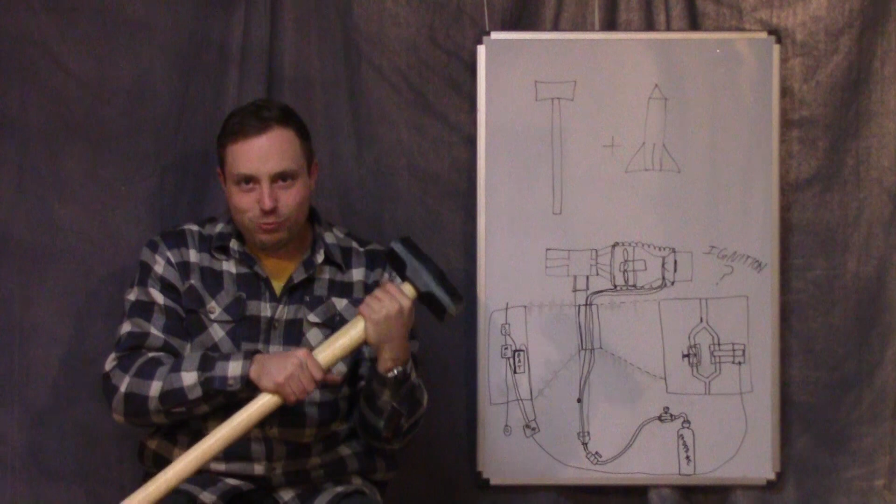How to hopefully build a real-life, no kidding, actual super sledge from Fallout 4. I don't know if I can do it, but I'm really gonna try. So, in Fallout 4, the super sledge has a liquid-fueled or hybrid-fueled rocket motor of some sort on the back of it. Sledgehammer, rocket, makes you swing it fast, hurts a lot, add a heating coil to the front, all that good stuff. I can't do that.

I talked to a NASA program manager, people that know stuff about rocket science, told them all my ideas about different options for fuel and what I could potentially run, because of the impact of hitting something with a sledgehammer. They said there isn't really a feasible thing that I could use as far as an actual rocket motor. They said use solid fuel, fire it once, reload it. I'm going to do that with F-44s from Aerotech. They're pretty high-powered model rocket motors. I'm going to use that on one.

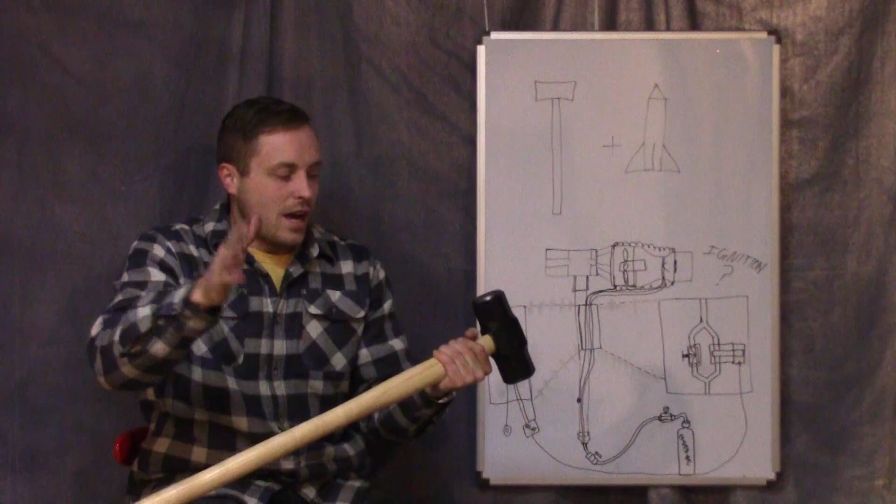But I want something that I can hit the button, and it goes, and you let off the button, and it stops, and you hit the button again, and it goes again. I want it to be on-off, like in the game. I feel like it'd be ridiculous if it didn't do that. So this is my plan.

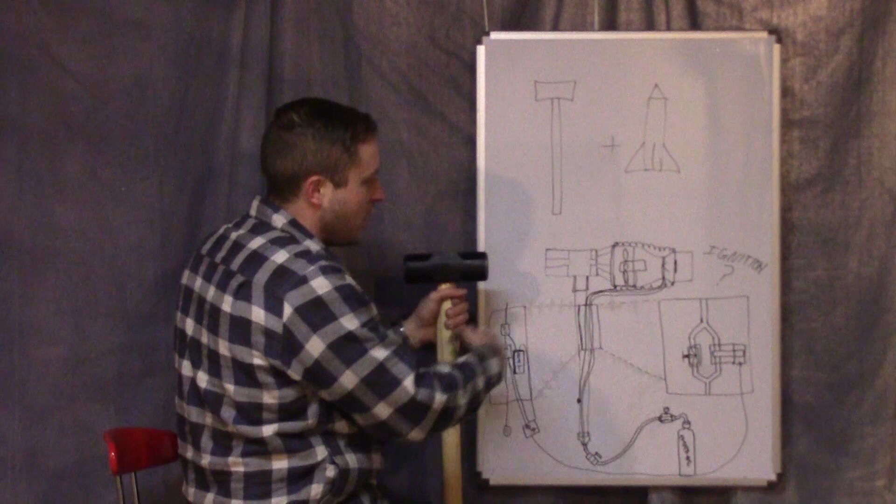I'm going to take some tubing, and I'm going to mount it to the back of the sledgehammer. I'm going to cut the back half off, just like in the game. Mount some tubing on here. I'm going to put the EDF jet fan right there. A little injector system right here, flame holder right there, spring system. I don't know what I'm going to do as far as ignition to get the propane lit yet. And then here's the rest of it. So this is my little control box that's going to have all my stuff in it. That'll probably go here-ish on the handle.

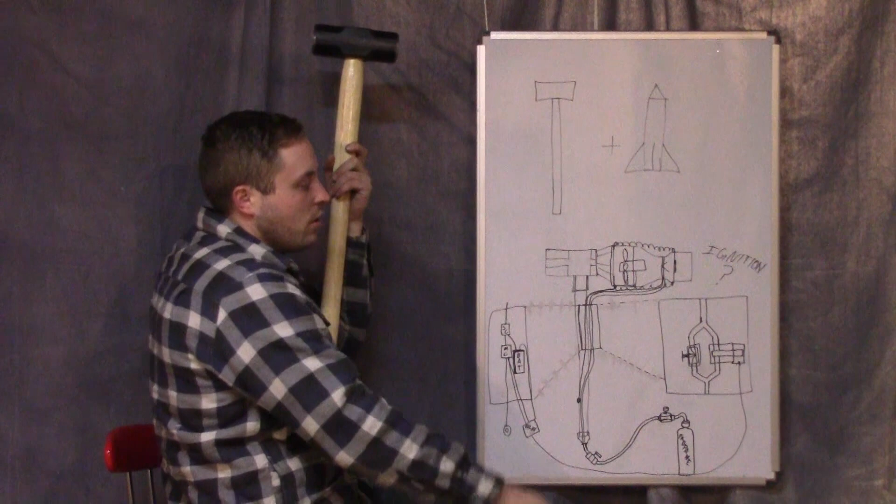And then propane will come in from here, through a regulator, through an on-off switch, up through the handle, in soft line, come out, go into my box. And then it goes into a needle valve system. That's my idle circuit. Lets a little bit of propane through for low-speed idle. And then this is my electric solenoid that'll turn on my full throttle circuit, which dumps a ton of propane in whenever the fan goes really fast.

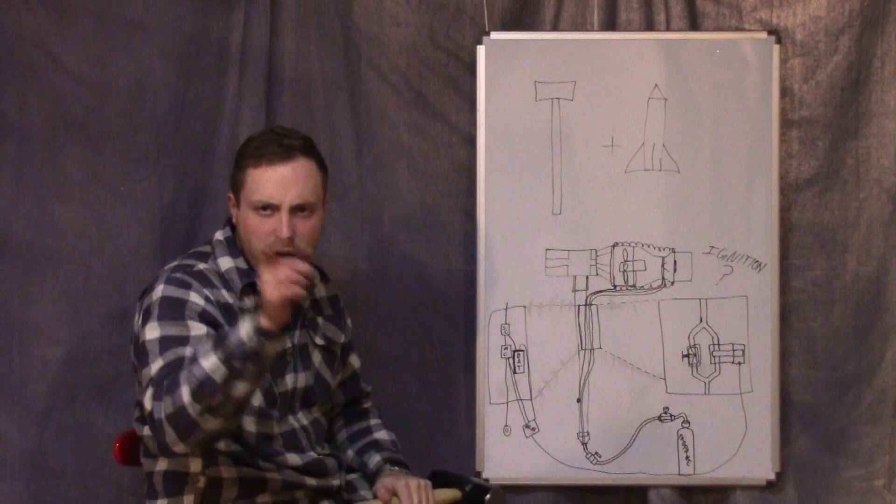So that is controlled by this relay or the microcontroller. I don't know if the microcontroller can put out enough juice to turn this thing on. I'll have to find out. If it doesn't, I'll have to run a relay that runs off the battery. Anyway, my microcontroller will be connected to my on-off switch, which makes the fan go full throttle and this open up whenever I want it to actually make some thrust and swing fast.

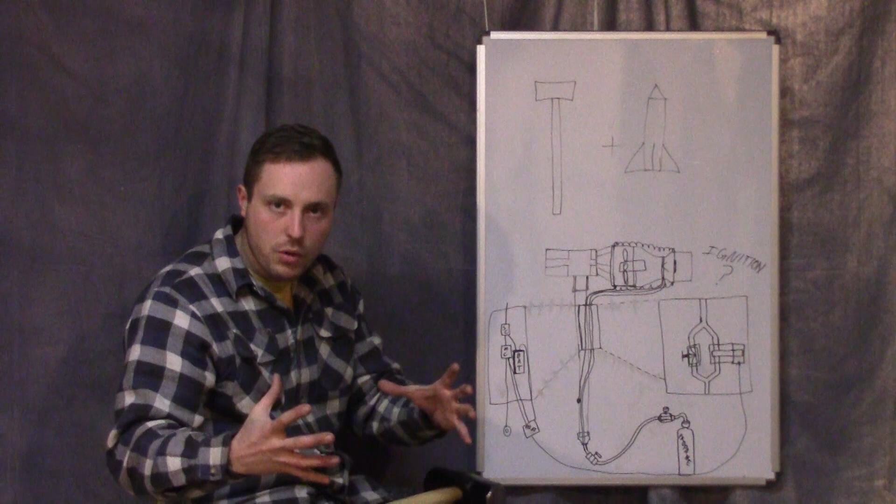And then the microcontroller connects to the speed controller because it's an EDF jet fan, electric ducted fan motor, and those are usually brushless, and mine is brushless. Brushless outrunner, and it's like a 64 millimeter fan, I believe. Anyway, you can't just control them with voltage. You have to send a sine wave to them. This thing does that.

I need to send one of those little things on the jets that move the little flappy doos back and forth. I can't remember what they're called right now. The servos. It sends a servo signal to the speed controller, and that tells it how fast to run the fan.

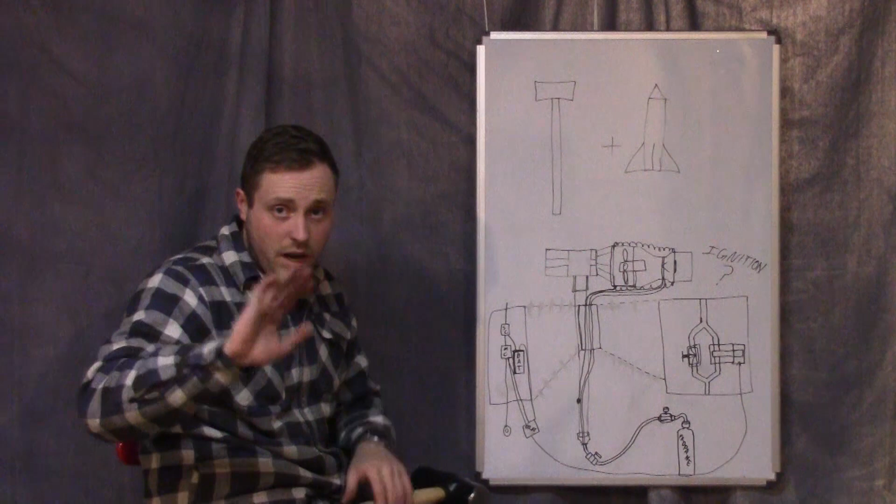So I don't know how to program my controller. I have no idea. I've never done it before, but I'm going to try to figure out how so that I can tell that to go really fast when I hit the on button, and when I'm not hitting the on button, it goes slow, and when I hit the on button, I want this to make this open and send lots of propane in so I get a big, bright blue afterburner flame shooting out the back that looks like the stuff from the game.

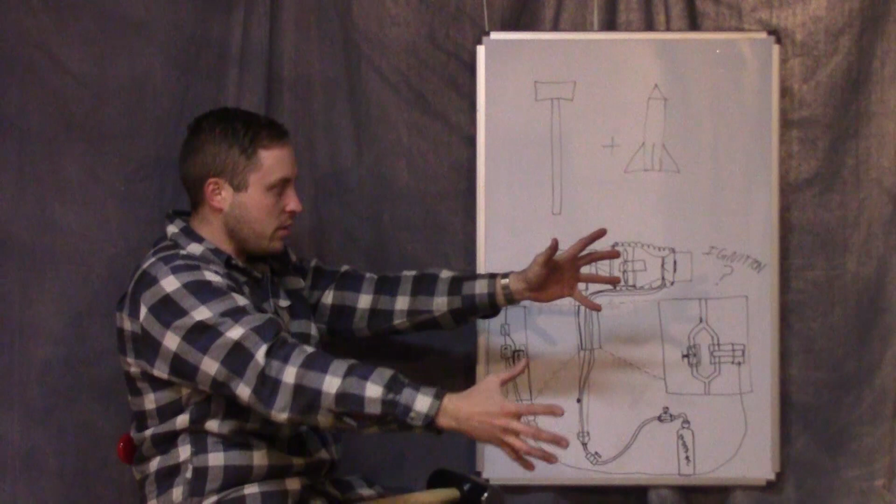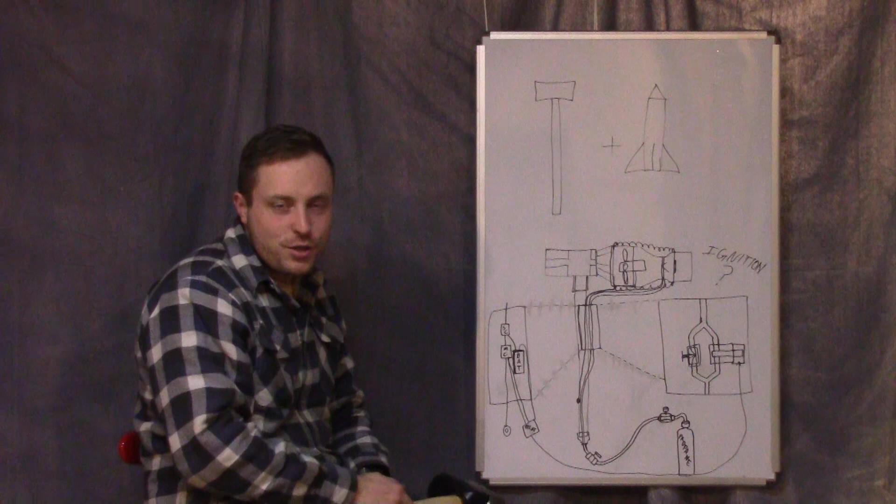The only difference is really going to be that I don't have a tank on the bottom side of the handle, and there's going to be space in the front for this to suck air in instead of a rocket motor that's welded directly to the back of the hammer. I don't know if any of this is going to work. There's probably going to be major changes in between, but I might as well get started and see how this thing turns out. Here's a quick look at the supplies that I think I need, including these exhaust pieces right here that have already been cut.

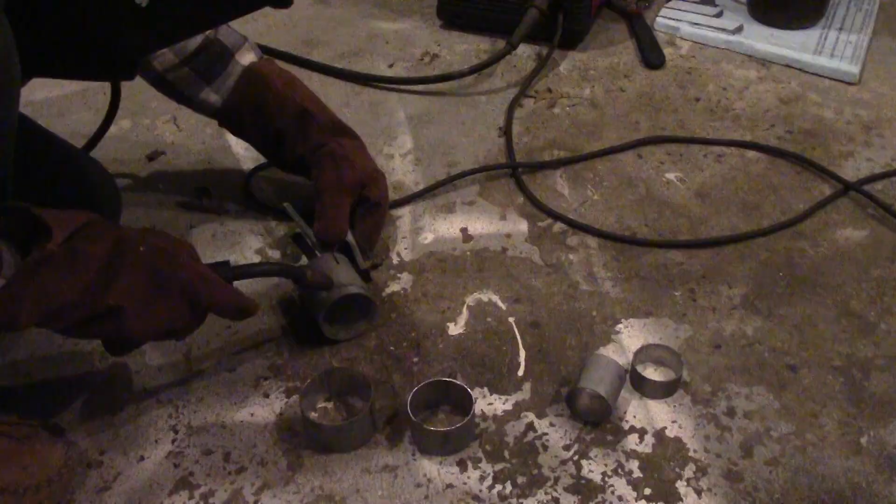Well, it's not as hard as I remembered, and yeah, it doesn't really matter if it's pretty because it's supposed to be from Fallout, post-apocalyptic, and look rough and dirty and gross. I'm just gonna tack the whole way around, that way I don't burn through. I don't think I will, but I'm not gonna take the chance. I don't want to have to buy more pipe.

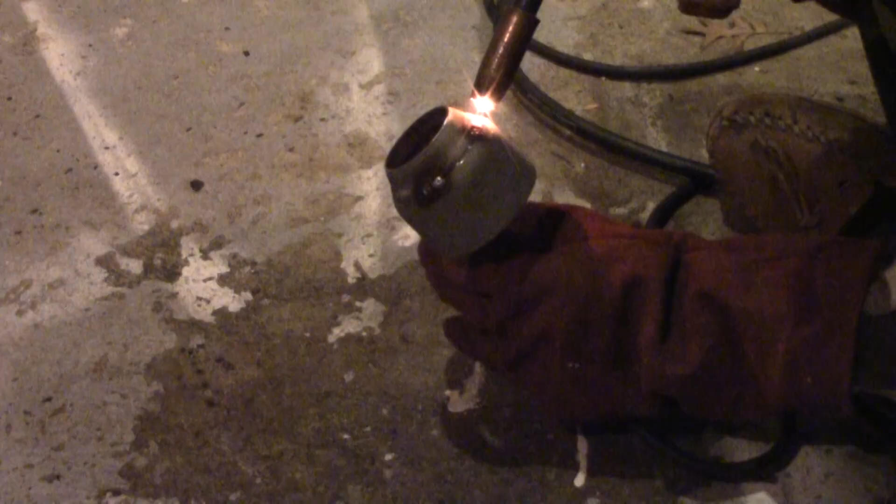I'm going to use this piece of paper as my guide to make my marks even around the outside of this motor for where I'm going to mount stuff, like the wires and the whatnot. So you wrap the paper around the tube and you tape it, and then you fold it in half twice, and you get your 4 even spots around the outside of the tube.

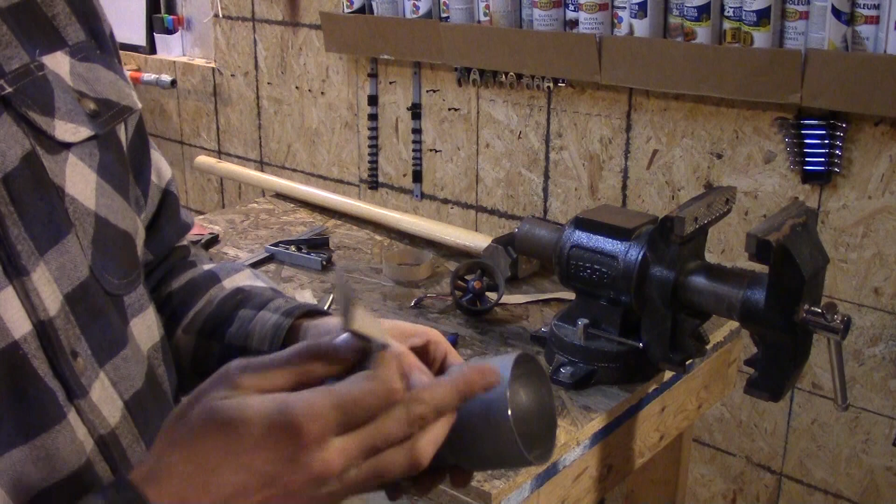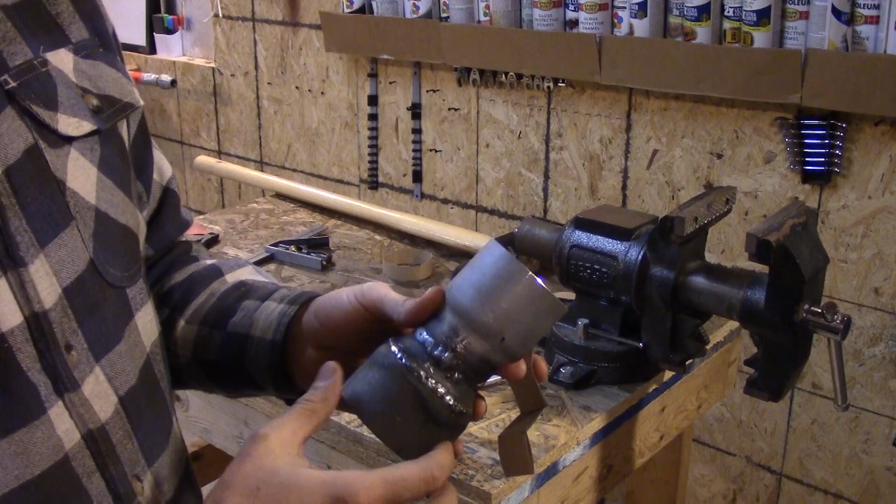Now for the back of this, I got my marks down for the flame holder, but I'm going to split this so I can have it come back together, give a little bit of a conical shape. So I'm going to make all my marks by folding the paper more, get the marks even so that I can split this a whole bunch, pinch it all together, and then weld it tight so it looks more like jet exhaust. Mostly for looks. I don't know if it's actually going to help it make thrust, but I think it'll look cool.

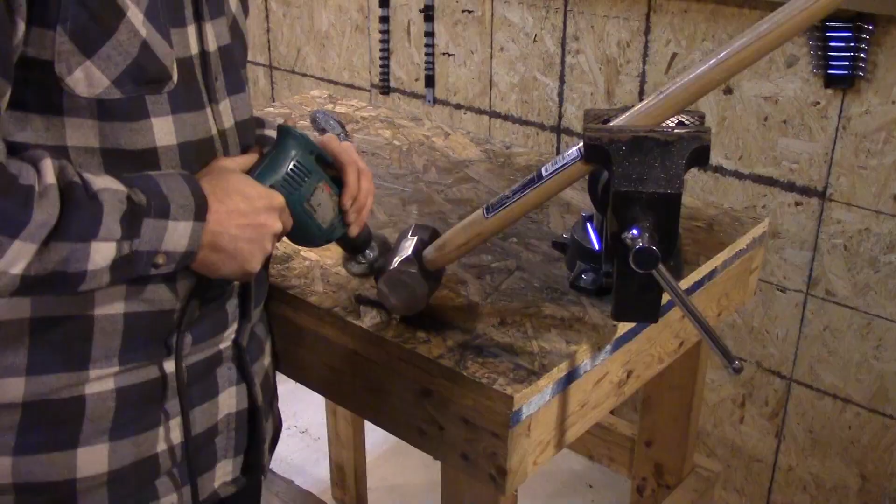I want to get this paint off the sledgehammer, that way I can weld to it, paint's not in the way, and then I'm going to knock the handle out so that it's easier to get around, because I'm going to put a metal handle on it. I've bought stuff at Harbor Freight before, and if you have, you know that most of their stuff that they sell there is junk. But I think this coating that's on this, which I'm pretty sure is powder coating, is probably the most resilient, strongest thing that they sell in the entire store. This is outrageous trying to take this off.

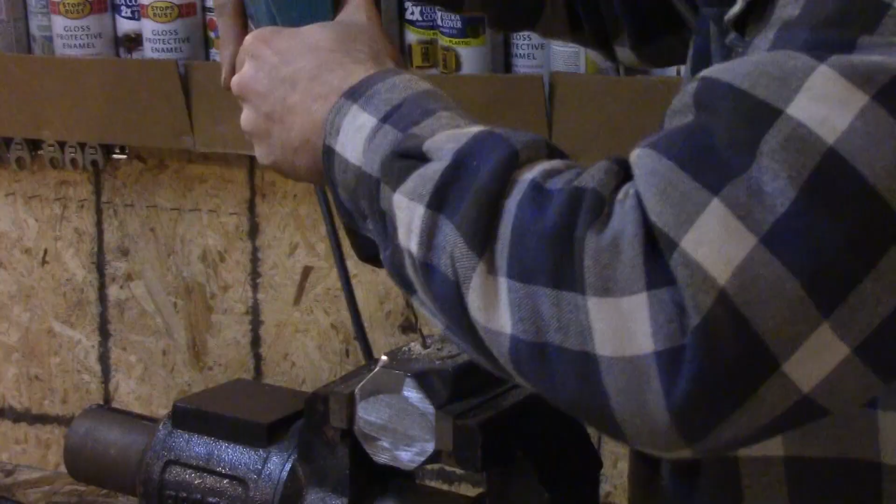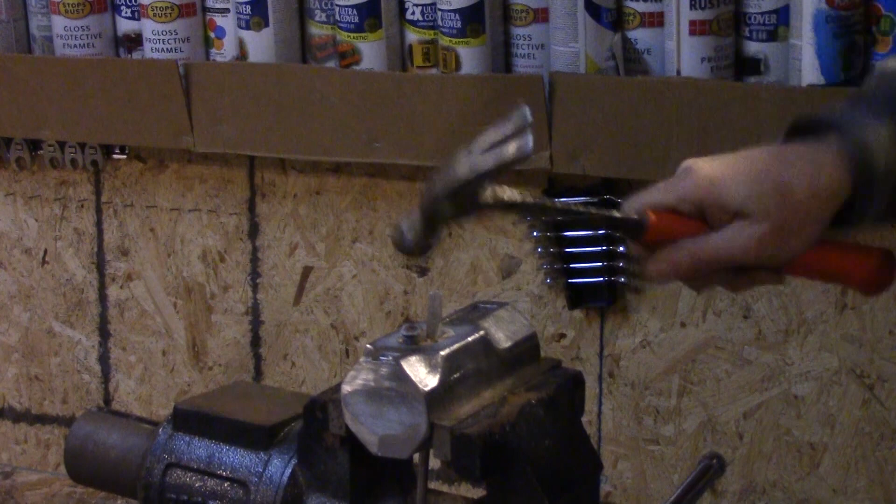Looks cool all silver, doesn't it? Ooh, it's pretty. It's a Sawzall. Look at how clean. Look at that. Chewed the crap out of it. Got it out though. Ooh. Safety goggles. There's chunks of sledgehammer handle laying all over the place.

Alright, so at this point you might be thinking, this guy's spending all this time making this jet exhaust nozzle and it's not going to do anything. Realistically, this isn't going to make very much thrust at all. I want to make the jet nozzle because it looks cool and allows me to put my flame holder in, which will get the right looking flame coming out of the back. That's basically it. If you want to know how these work, do some research on your own.

They're not that simple. Like an afterburner system in jet exhaust superheats the exhaust even more than it already is, and because of the extra pressure in the back, it makes the exhaust exit faster, and the speed of the exhaust exiting the engine is what produces more thrust. Now with this, I don't have superheated air coming in because it's running off of an EDF motor, and it's just not going to have enough speed for the afterburner to make a difference, but it is going to make it look awesome.

Ooh, that's in my skin. I got all the slits cut in the motor to make the nozzle. So now I'm going to put my flame holder in and pinch this together and weld all that stuff shut.

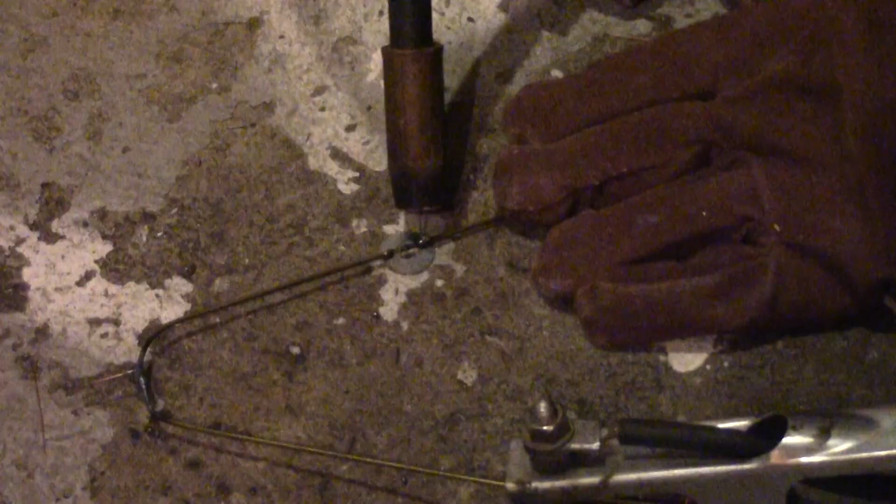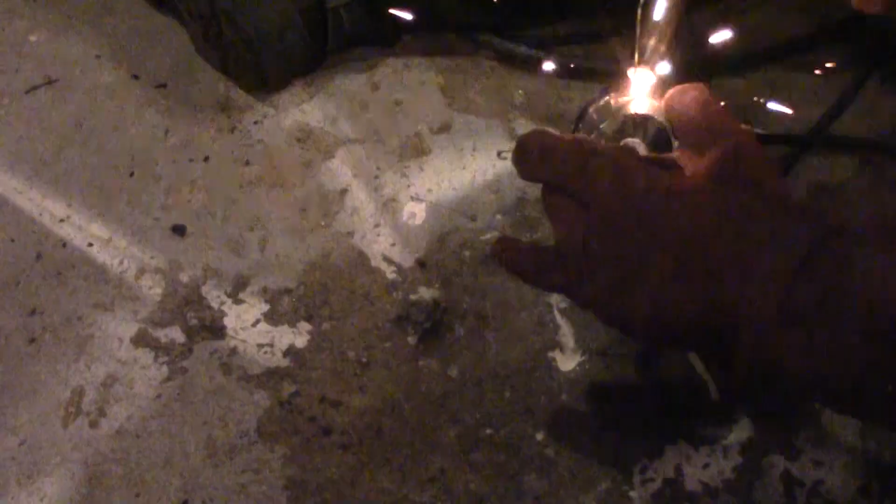Here's my flame holder. I'm gonna grind that wire out of the middle and clean it up and then stick it in my housing. Well, eyeball check's good. Hopefully I don't screw it up when I weld it together. Jet engine.

So remember how I said I wanted this to look post-apocalyptic and I didn't care how my welds looked? Or at least I think I said that. Anyway, they look horrific. I mean, absolutely terrible. Look at this. It's just awful. And to me it looks kind of cool, but I think it would look cooler if they weren't quite so bad. So I'm gonna grind off stuff like this and try to make it look more like that, right?

So I'm gonna clean this up. I think that looks better. I'm not sure if I'm gonna re-weld anything or not, but I at least like the way this looks pretty good now. If you're familiar with the game, it has a big nut that it looks like it screws into at the head of the sledgehammer.

But I couldn't find a nut that looked like that anywhere, so I'm gonna use this, and I'm gonna grind the threads out so I can slide it down over it, because this pipe is long and I'm gonna cut it down some. It's 48 inches. So I need to grind the threads out so that this will slide over it.

So then I'll cut the pipe to length, I'll weld the pipe to the head of the sledgehammer, and then I'll slide this over the handle, weld this to the sledgehammer, and then weld this side to the pipe. That way it's reinforced. So part of it's for looks, part of it's for reinforcement.

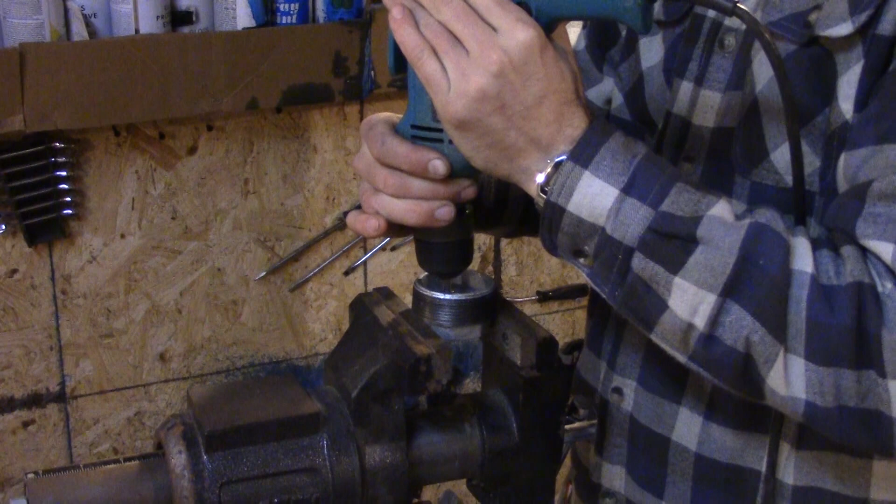Success! The only reason I got 48 is because they didn't have any pieces of 36-inch pipe. But it actually works out because I can cut this to length for my handle, and I got 1 inch because I felt like it gave you a good grip. But it also happens to fit my Aerotech motor perfectly. So I'm going to use a piece of this after I cut this to length for the handle to make the housing for this motor on the other sledgehammer.

Worked out. Let's close. Makes no difference. Yep. Lose my head if it wasn't screwed on.

If you're thinking, oh, he's lucky, he's got a shop, he can do all that stuff. It's like 34 degrees outside right now, and it's about that cold in here. It might be 40. It's not very much warmer. And also, all these tools are from like Craigslist and Harbor Freight and that kind of stuff. I'm cheap. I'm poor. I'm not cheap.

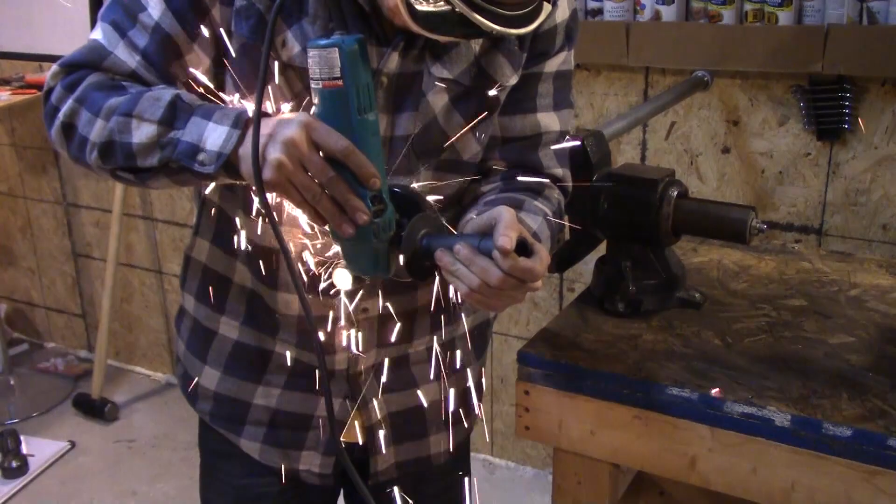I feel like I should explain something real quick. This has the fan housing. The overall area of the fan housing minus the center where the fan blades come out from and the motor, which are the same size, comes down to this. Like if you take that circle out of the middle, it becomes basically this size.

This is slightly smaller, so I'm actually compressing the air slightly right here. This area allows it to expand slightly and therefore slow down, which is also where my flame holder is, so I hope that that makes it more efficient at holding the flame in the afterburner chamber.

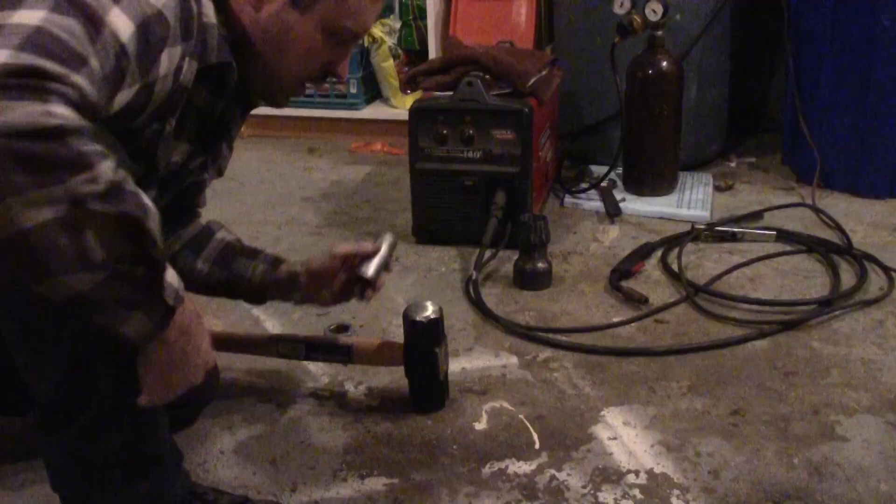So to get some practice welding my handle to the sledgehammer, I'm going to do this pipe to the back of this one for the solid fuel rocket motor. That way I can see what it takes and get the welder set up for it and all that stuff. I don't care what the weld looks like on this. This is just to test to see what it'd be like if I had a lot of thrust on a sledgehammer. So this is my practice.

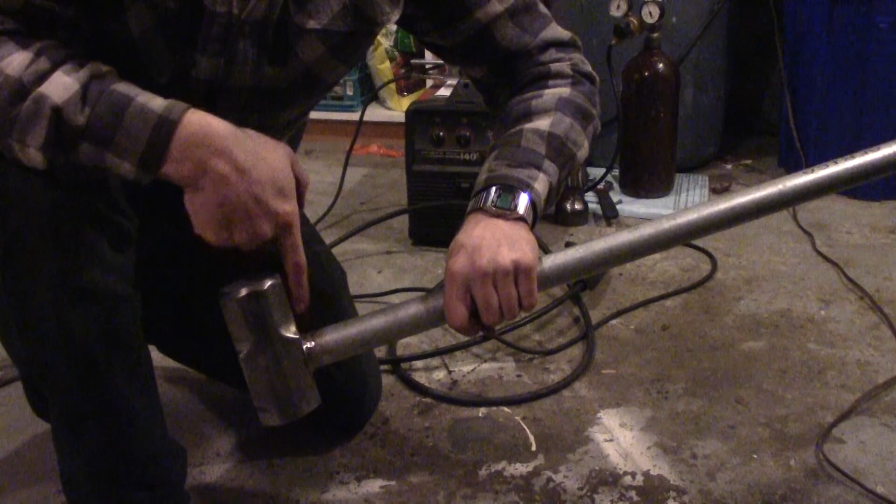All right, there's that. Now remember, if you can't weld very well, it doesn't matter if you're good with a grinder. Reinforcement. Now it's time to do this. Time to put these little jobbies on to hold the springs in place.

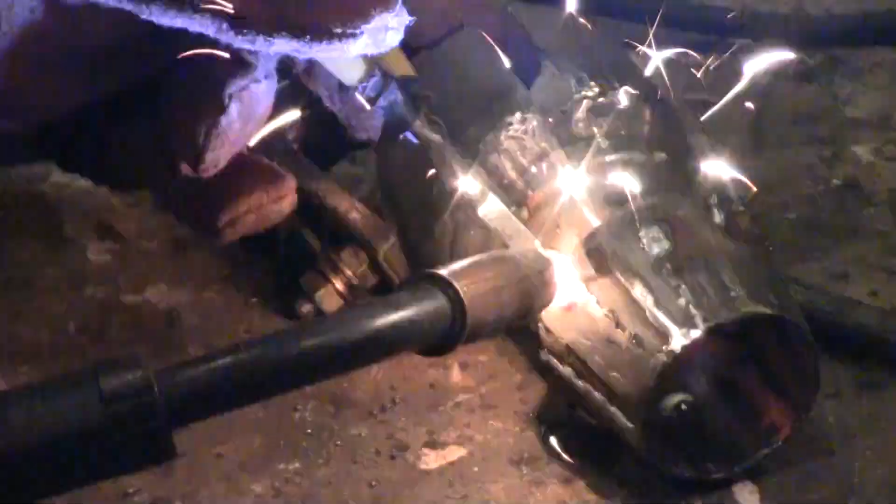Well, they're on there. They don't necessarily look good, but that is what the grinder is for. I just noticed that I can see the seam right here. It's less than hairline, but I'm gonna put another bead across this section also.

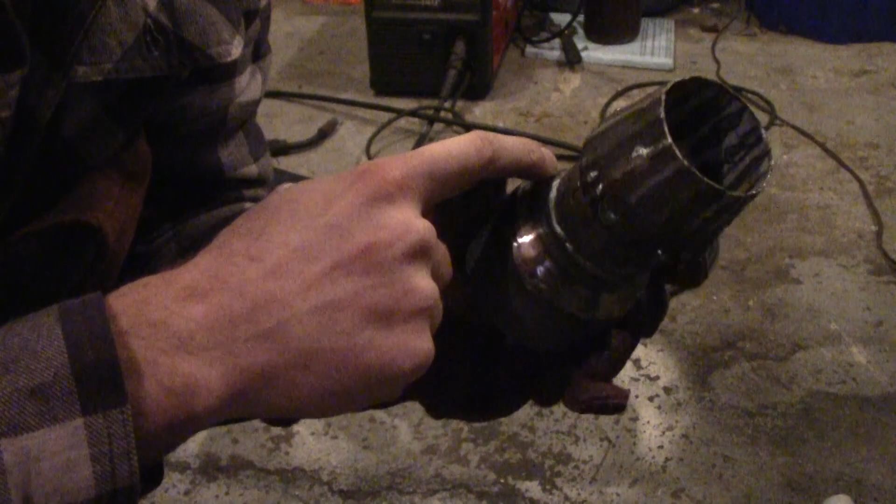Now she's stuck together. You know, realistically, for taking welding in high school, I feel like these aren't too bad. Considering when I first started, they looked like a blind monkey tried to do it. I feel like they aren't awful. I mean, they're awful, but they're not like really awful. Come here, I'll give you a close-up. Okay. How's that? Good, all right.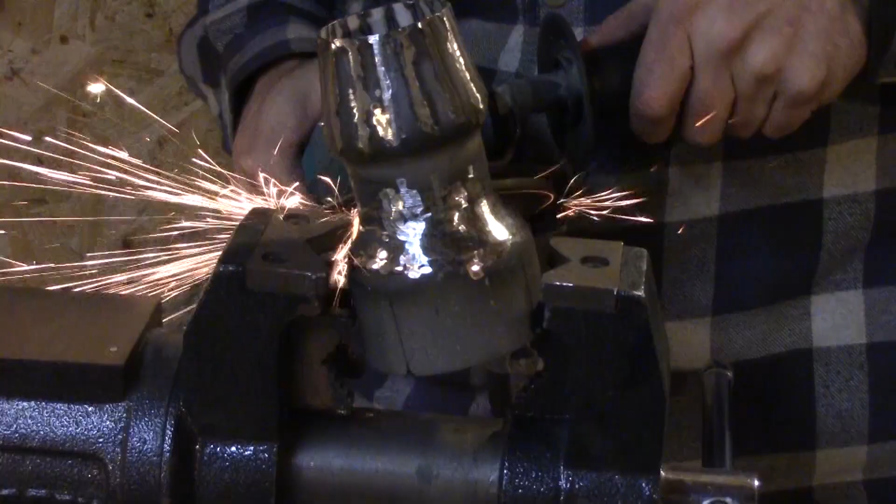Well, I got the wire wheel and the grinder out. I might as well take care of this. See these little weldy balls? I'm gonna knock those off with the grinder, and then I'm just gonna clean this up with the wire wheel. Ooh, pretty.

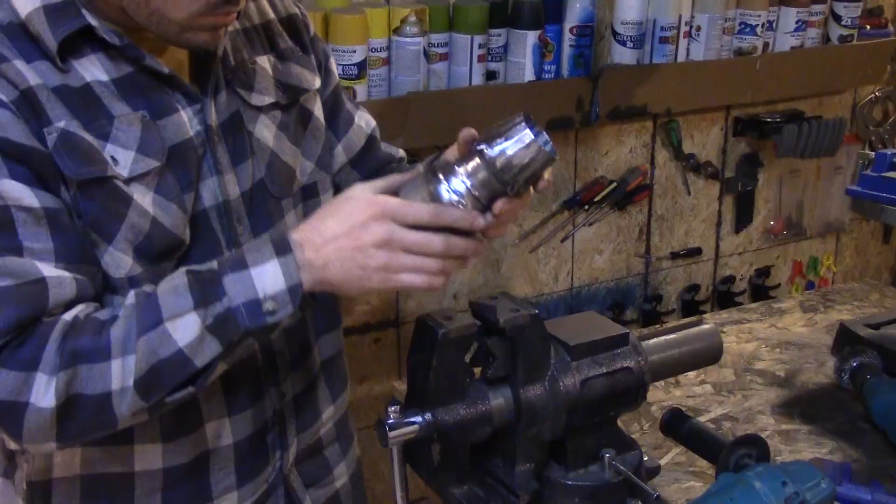I cleaned up those welds. Don't think I'm going to try to run pretty ones. Kind of like the way it looks just with the scratch sections on the back, and then this cleaned up with wire brush. I think that looks sweet. It's still messy and ugly, but I feel like it's pretty post-apocalyptic looking, and I'm going to leave it this way. So yeah, there's my housing.

And it's pretty much done except for putting my fuel thingy in there and strapping the engine on and attaching it to the sledgehammer, and yeah, so it's not done, basically is what I'm saying. Might as well put this little doohickey on.

Now I gotta mark the jet housing that fits in here for the retention wires that will attach to the springs for their placement to keep this thing centered. Well, it kind of keeps itself centered since the inside of it's conical, but still,

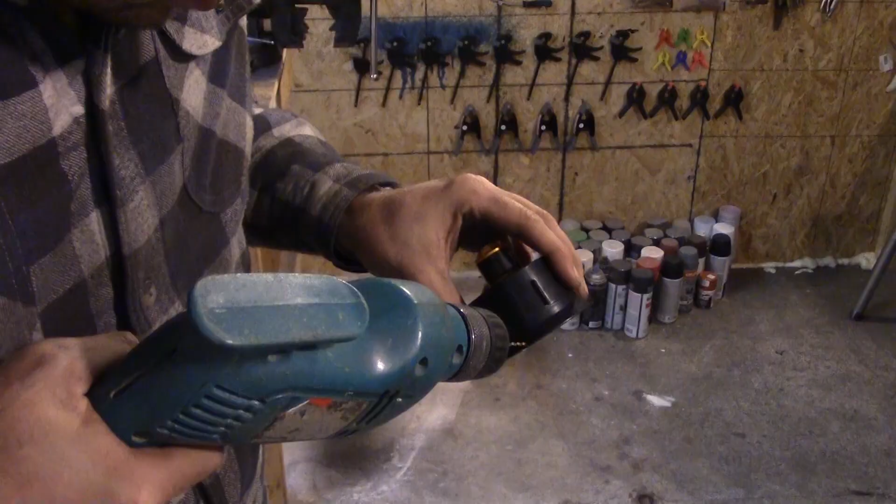I'm going to put these marks on here, drill the holes, and stick coat hanger wire through to attach to the springs. That'll keep it pulled back into this, but allow it to spring out so that it doesn't shatter when I hit something with the sledgehammer. I should also mention I wasn't terribly worried about this because I have a spare housing for this thing. And spare motor, actually.

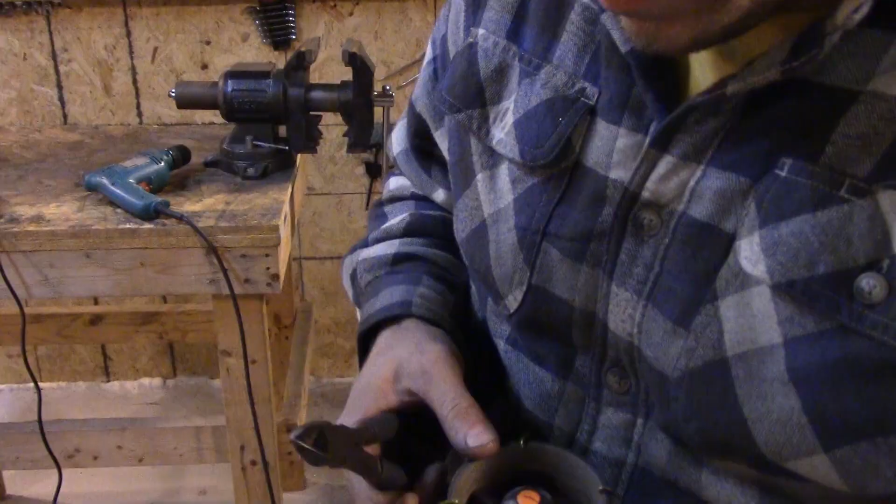There, wire's attached. Now I'll put little loops on this side, that way the springs can attach to it. Engine retention hooks. Free from a coat hanger. Cut those little recesses earlier, eyeballed them. Yeah, blind squirrel found a nut. How you like them apples?

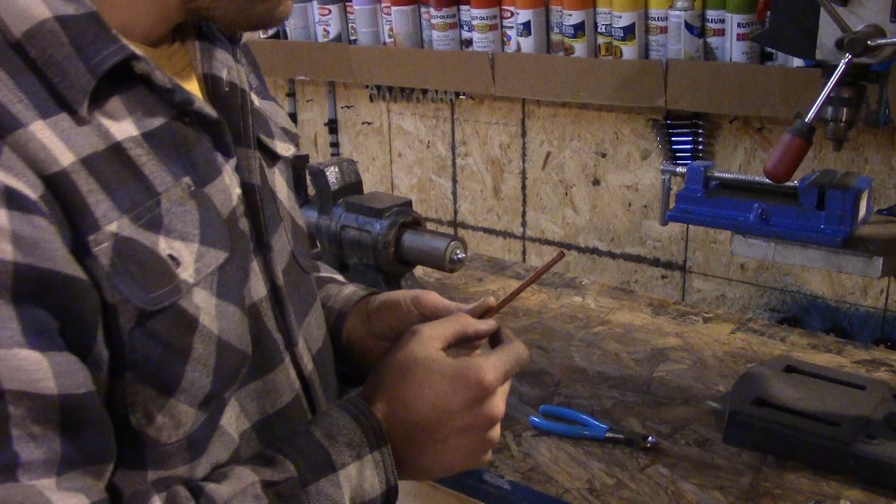Yeah. Before I mark my holes for the fuel injection, I need to crimp the end shut and braze it to make sure that propane doesn't come out of the tip of it. I should also mention at this point that I don't know what I'm doing. I haven't brazed anything since, I don't know, it's been a really long time.

I put this in the housing and marked off where I want the holes to be. Basically it's going to be 2, 1, 2, 5 little tiny holes with this little itty bitty tiny drill bit. And now you get to watch me drill them. You can see the drill bit wandered a little bit on one of them. I got holes though. I'm going to attempt this soldering brazing thing again because I got to put my fuel injector in. So hopefully this works.

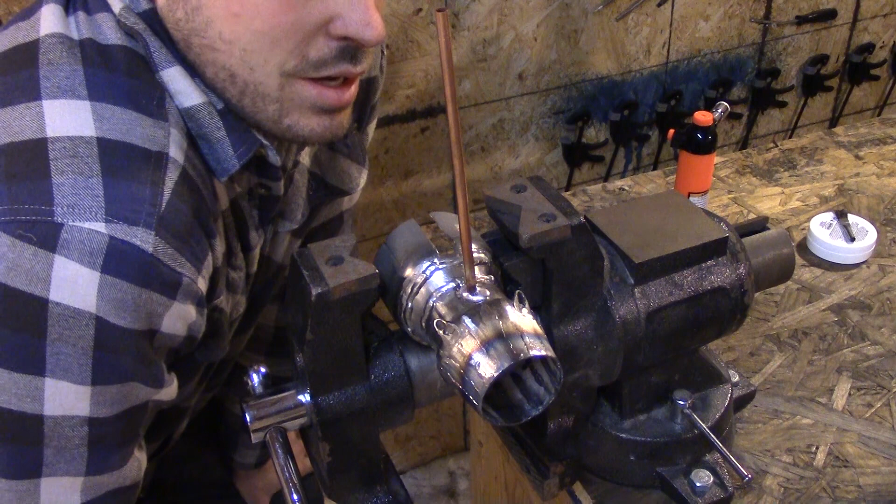Alright, look, at this point this is a pain in the butt. If somebody wants to tell me in the comments what I'm doing wrong and why this, oh well, it's sticking to the steel, but it doesn't like, you know, I don't know. I don't know what's going on. I mean, obviously that's why it's called Jack of All Trades, Master of None, because I don't know what I'm doing. I just do everything. I think I almost had it that time. Wish me luck.

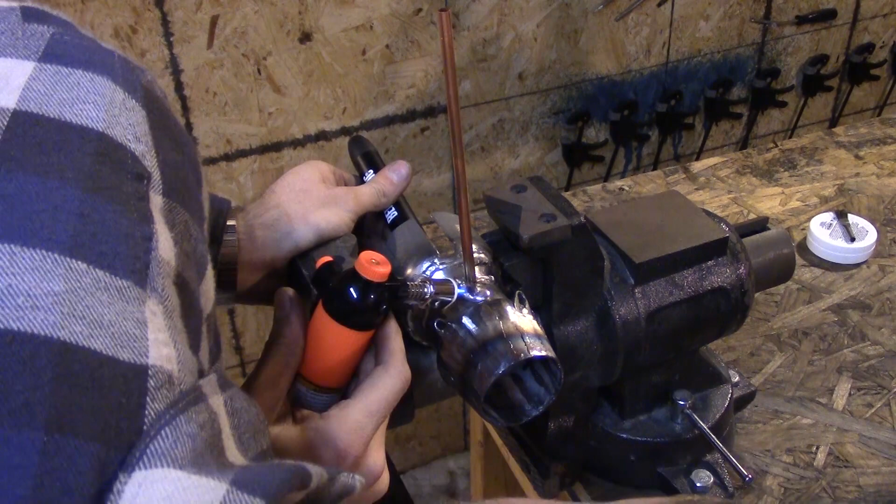Alright, that's hilarious. The inside part was a nightmare. So I had to clean all the solder off of the bottom because you can see a little bit still up there. Can't get that to melt right now. But that dripped down, a huge amount, to the bottom. And the reason I had to try to fix it in the first place, and it was working out all right in the beginning, was because that little hole that you see in the middle is my center injector hole, and it was not lined up at all. It turned like 25 degrees.

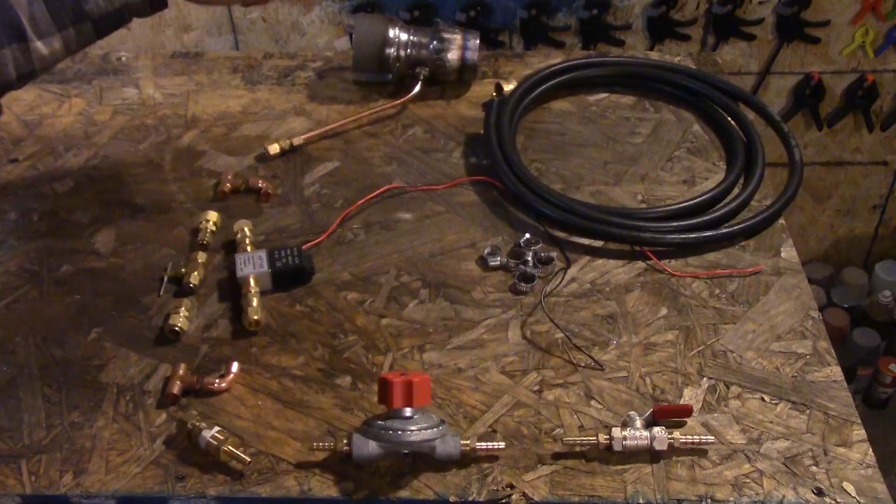I think I'm at the point now where I can set up my plumbing. We'll start at the bottle. The bottle gets screwed into this hose. Right after it gets screwed into the hose, I'll split the hose, I'll put it on a shut-off valve. That's pretty much the only safety measure I have with this thing. Then I'll take a long piece of hose and bring it to this, which is my regulator.

And then after that, the hose that comes off of this will go through the bottom of the handle. It'll go up through the tube, out of the hole that I cut, and then it'll connect to this piece. And this connects to a compression fitting, and I know you're not supposed to use compression fittings with gas, right? It's just supposed to be for fluids and stuff. Anyway, I don't really care. I like to live dangerous.

That will go into a small piece of copper that allows it to hook up to this T fitting, and then another little piece here will go into that elbow. That way my line splits. My electric solenoid will control my full throttle, and this will be my idle circuit.

Those go into these crush fittings, and then I had to convert this from pipe thread to NPT. It'll convert back to copper pipe and into this, and then this side will go from 3/8 down to quarter because I couldn't find a needle valve, metering valve that had 3/8, so I had to convert down to quarter for that, and then quarter back up to 3/8, and then back to the T, and then everything's back together and you're in the normal fuel flow again.

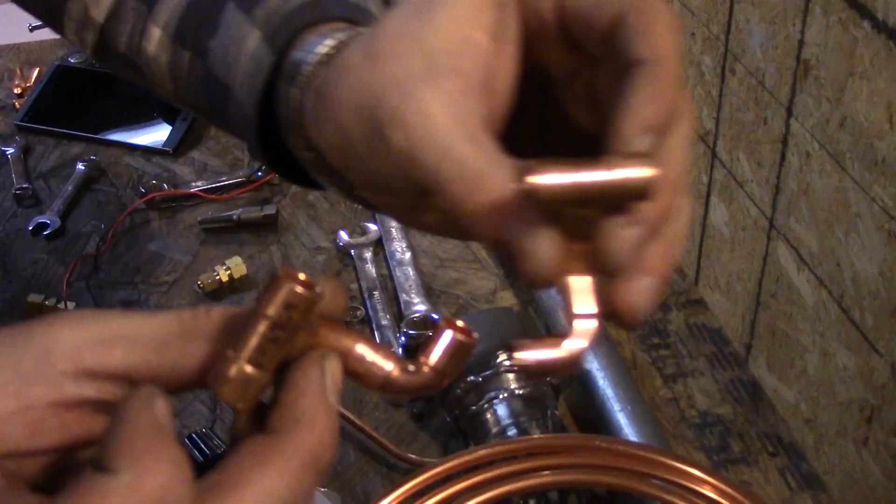These pieces will sit like this. That way the gas is split, and this piece can sit on top. I think. Maybe I'll run it this way. Yeah, I'll run it like that. I think. This would be a lot easier if I didn't have to make everything as small as possible to fit on a sledgehammer. Or if I had experience in plumbing.

So since I'm sitting here working on Teflon taping threads on compression fittings that you're not supposed to use on gas line, these needle valves have compression fittings, and these are made for flow control of gas. Not necessarily propane, but on the little baggie that comes with these, it says that it's made for controlling venting gas. And it has compression fittings in it. You can't get these without compression fittings, at least not at the hardware store. I don't know, maybe you can online, but why is that? If you're not supposed to use compression fittings with gas, why do they make these things?

That doesn't make sense to me. What's the difference between tube and pipe? I don't know.

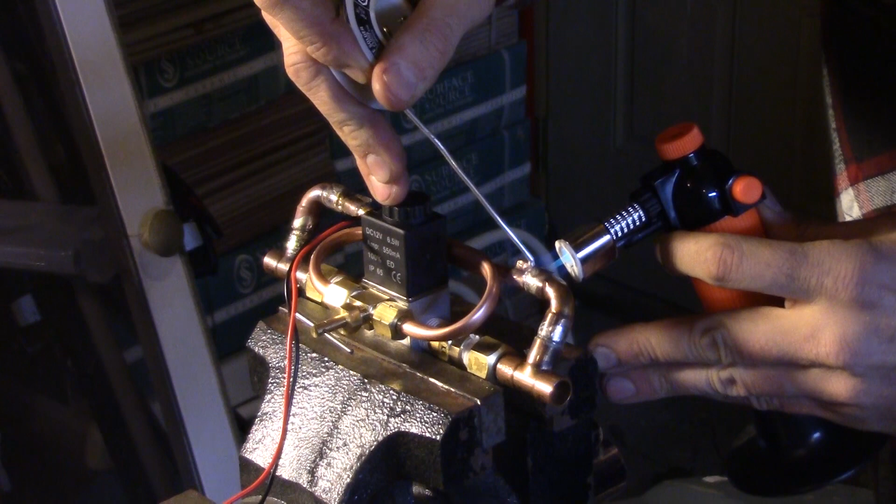It doesn't matter which way it flows through this, it only matters which way it flows through the solenoid. So I'm going to put these in and braze everything together, and almost done. Oh, I didn't put flux on. Here we go. Well, I think I did it.

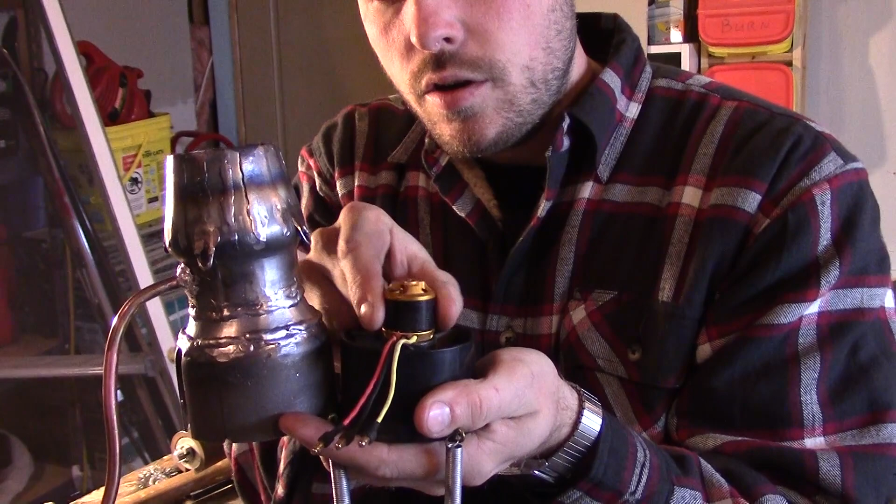My measurements were okay for reducing the pipe down for the size of the motor and the fan housing, or the fan holder and all that, because that's standard diameter through there. So this is the right size. It's just I didn't make the front of the housing deep enough. The motor should be ending right here where it starts to constrict, and it's not. It ends like up here, which is ridiculous.

So I measured wrong. I'm gonna have to measure again and add a ring to the front of this with some of my scrap pipe so that this sits where it's supposed to, basically right there. So time to do more welding.

If you noticed before, I was using a Makita grinder, and now I'm using a Fein grinder from Germany. The reason I got this was because my Makita sounded like it was starting to die, and I didn't want it to die, so I got this because there's a YouTuber called AVE, and he does tool reviews and all kinds of other awesome stuff, and the guy's really funny, but he takes everything apart and finds out what's actually good, and he said that this one was good. Or, well, except for a couple things, but still, it's supposed to be a great tool.

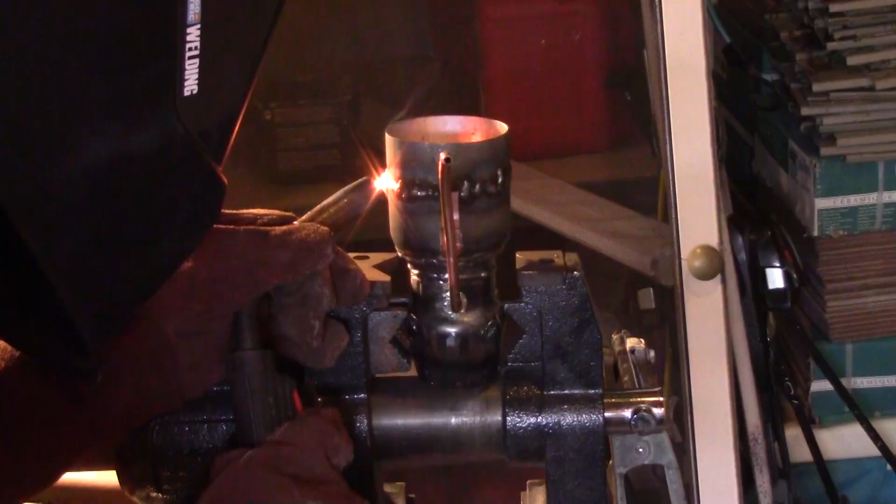I'm going to cut that slit out for the wires that come out of the motor, but I'm going to cover this with metal on top to give the wires more clearance. Plus that way they slide in and out easier, I believe, instead of dragging through that slot. And that means I'll have to cut this, put a piece of metal over it, and then I'll have it recessed up here for the wires to actually stick out. Should work out pretty well. I almost forgot to cut those notches for the clippy doos on the fan.

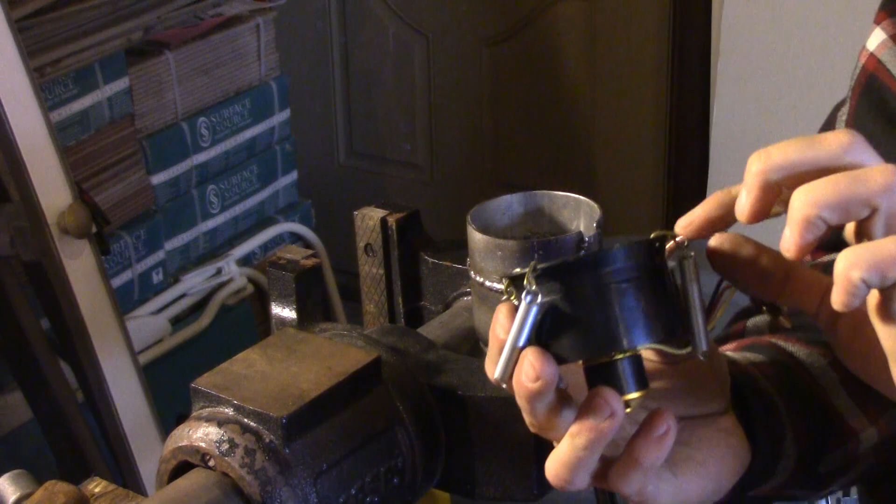I need to bend and cut 8 of these from this threaded rod because I'm going to weld the housing to the sledgehammer head at each of the 8 points on the way around. So this is going to take a little bit of time. Now the problem with this is when I go to weld these to this housing, I can't do it at the same time that I'm welding it to the sledgehammer because there's plastic in there, right? And if I weld this to the sledgehammer at the same time, I can't put this in, but I can't have that in there while I weld it.

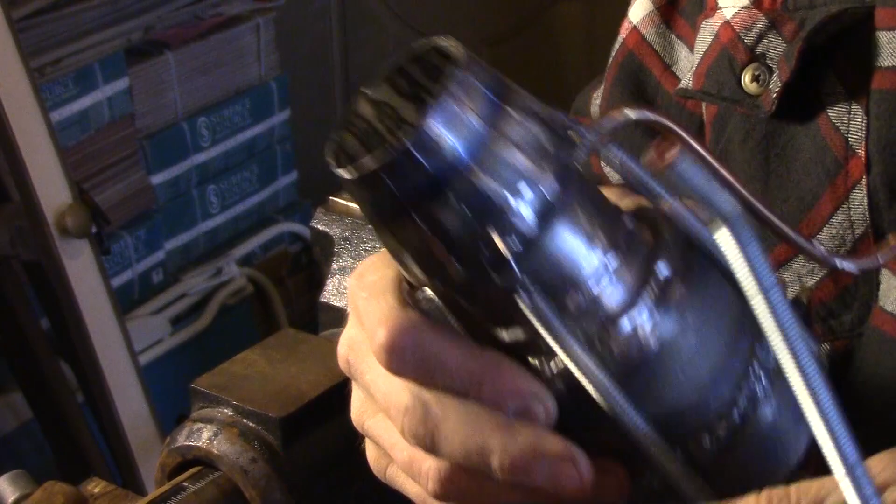So basically I'm gonna weld these pieces onto this without the motor in, and then after I finish doing that, I'll put the motor in, and then I'll put it to the sledgehammer, and I'll bend these all into place, and then I'll weld it to the sledgehammer. Hopefully without melting the motor. Hopefully.

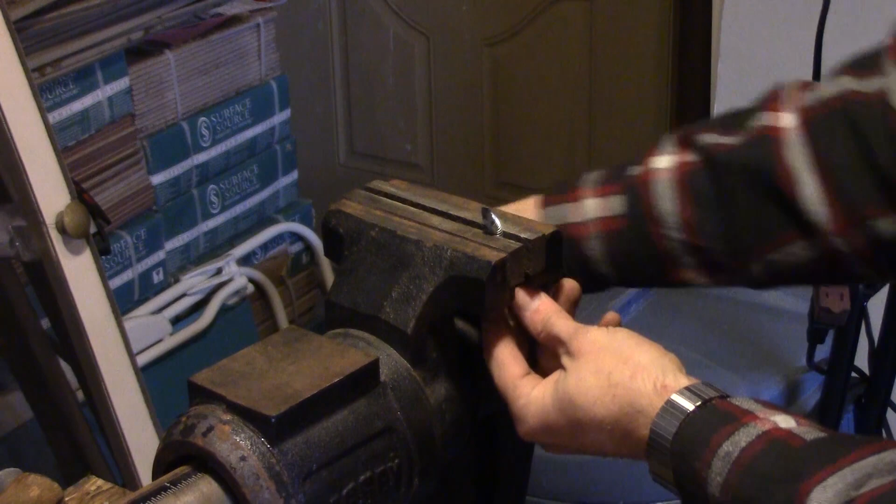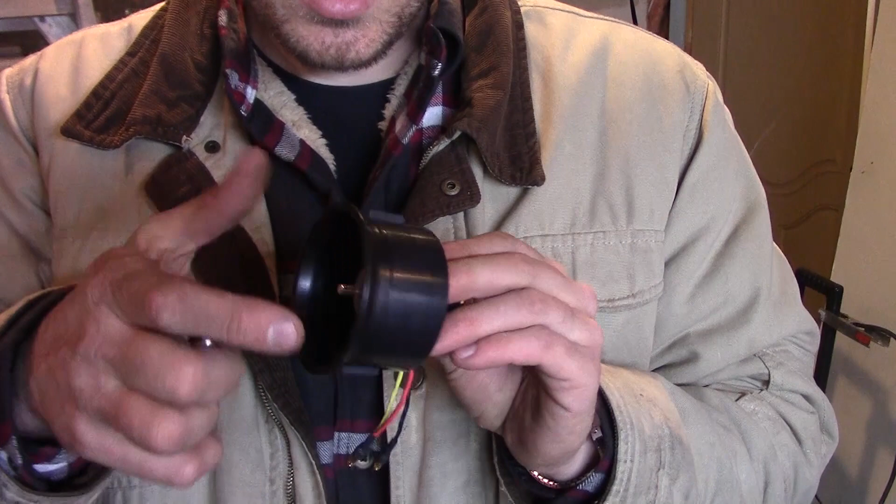That's really irritating. Luckily, even though I broke the crap out of this just now, I have a spare one that the blades broke on when I rammed the jet into the ground. Faster than it could fall because it was full throttle and I pointed it straight down instead of going straight up. I was trying to do stunts. Anyway, I'm gonna switch the blades onto this and that should solve my problem. For now, till I break this one.

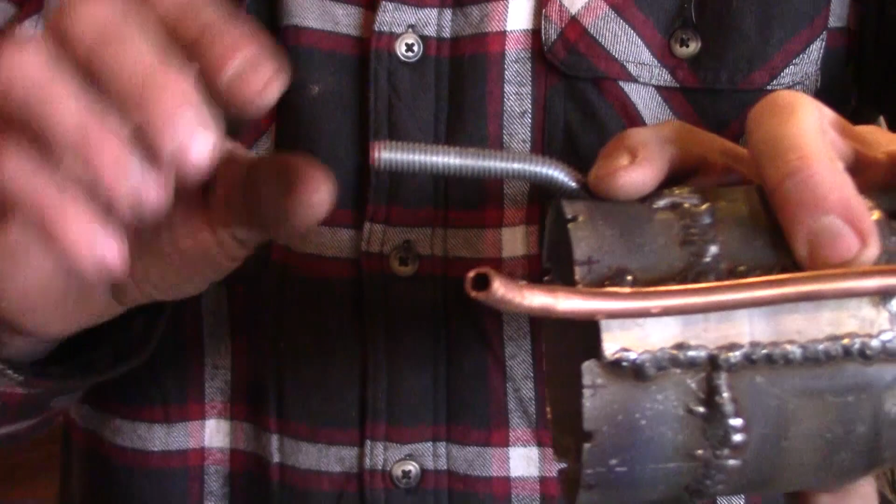Then I'm screwed. All these little threaded pieces that I cut, I just eyeballed. You can see my little marks there, right there. Anyway, all those little marks around there. That's where I'm going to weld these on to the housing, and basically they'll be like that at first, and then I'll bend them in to meet up with the sledgehammer after I get the fan put in. I hope that's enough to make this thing stay in one piece. I feel like it should be, but I'm really not sure.

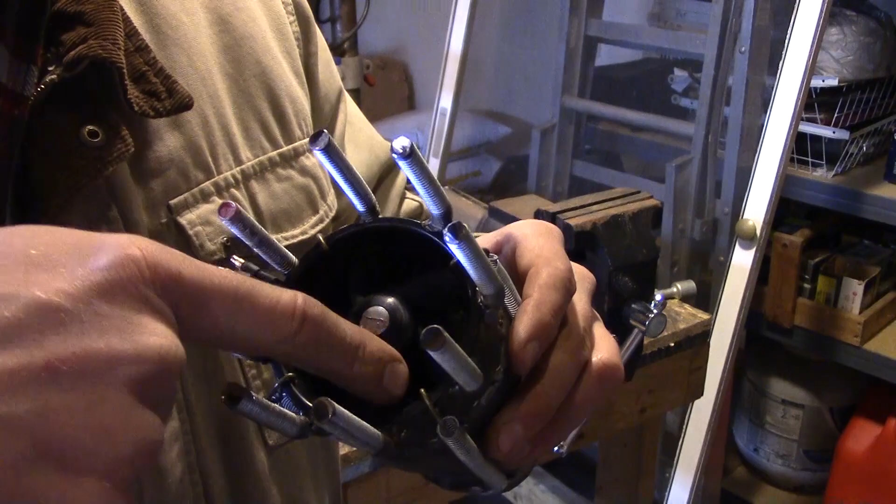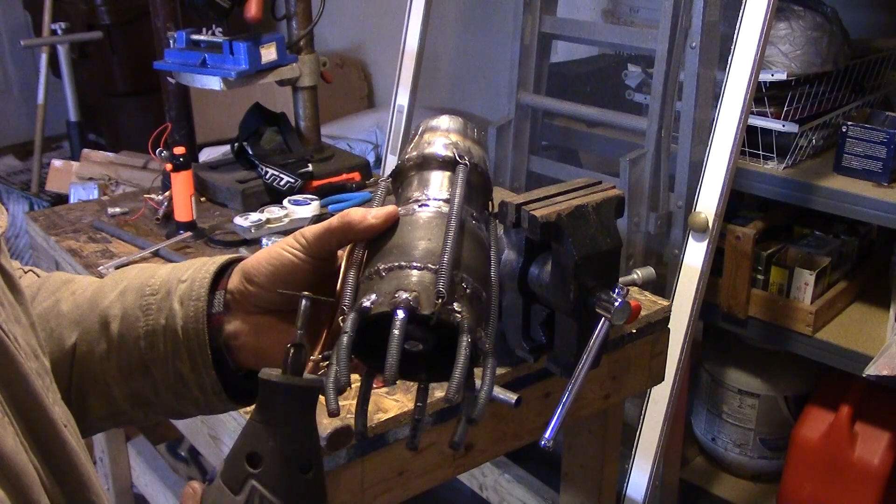New plastic housing installed with the fan blade, and the springs are reattached. So I think I have an idea for how to bend these without breaking anything. So I tried to bend them in like you saw, and that didn't work. I can't get them to bend enough, so I decided to cut little slots in them with the Dremel, basically about halfway through, and that way they'll be easy to bend right at that point, and I can get them attached to the sledgehammer. And then I'll weld in that cut that I made. Hopefully I don't break any off.

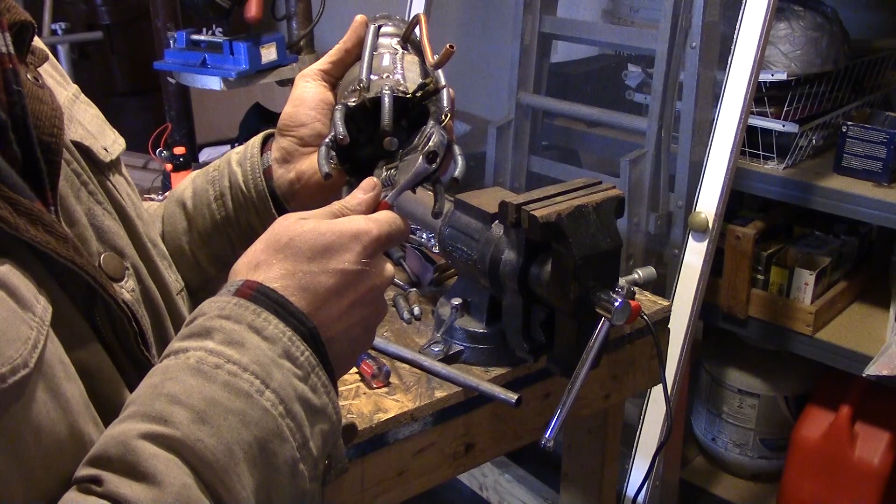Oh, it's so easy to bend. So easy. Look at that. Just, oh, perfect. I'm so glad that worked. Oh, that one's very close to breaking. There goes one. Before I weld more, I'm gonna let this thing cool off because I do not want to risk melting my plastic jet engine dealio. Looks okay so far.

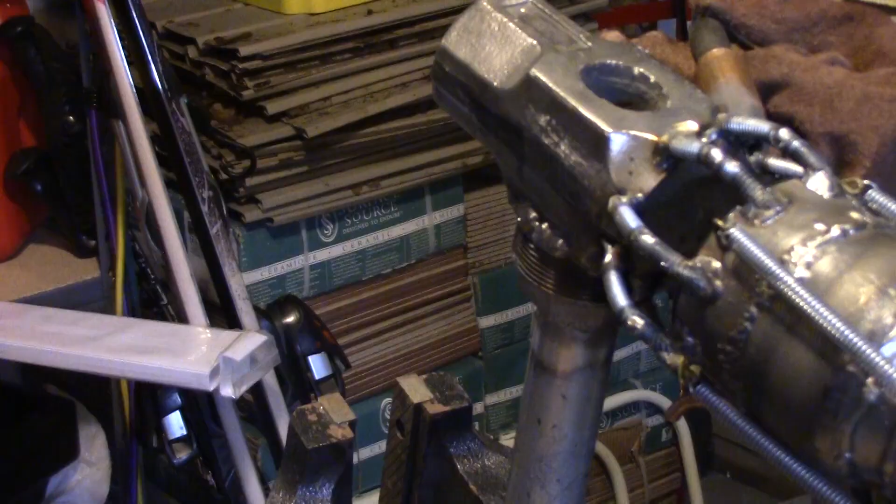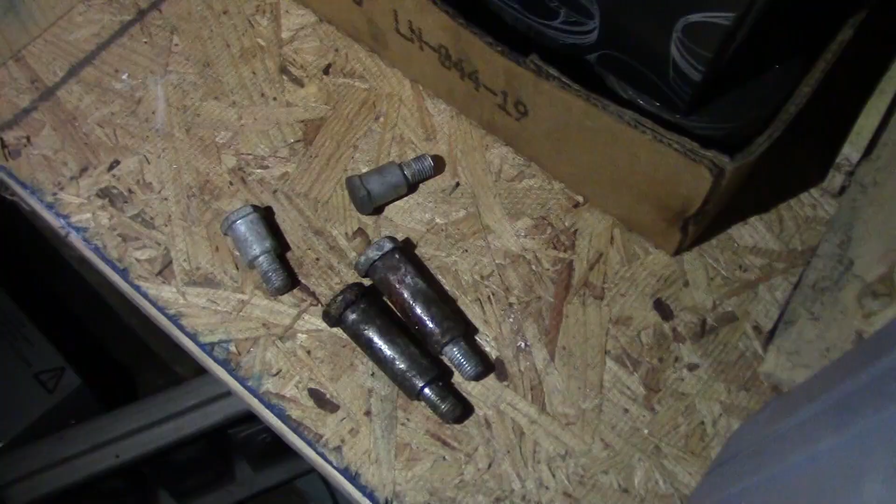I need to go out to my other garage to get, whoa, that's nose deep. I need to go out to my other garage to get big bolts to finish up the mount points for the housing on the sledgehammer. And it's the blizzard of 2016. I found some in my cooler full of randomness. Yeah, that's at the knees. Whoa. Oh, now it's not so deep. It's like up to the roof right there.

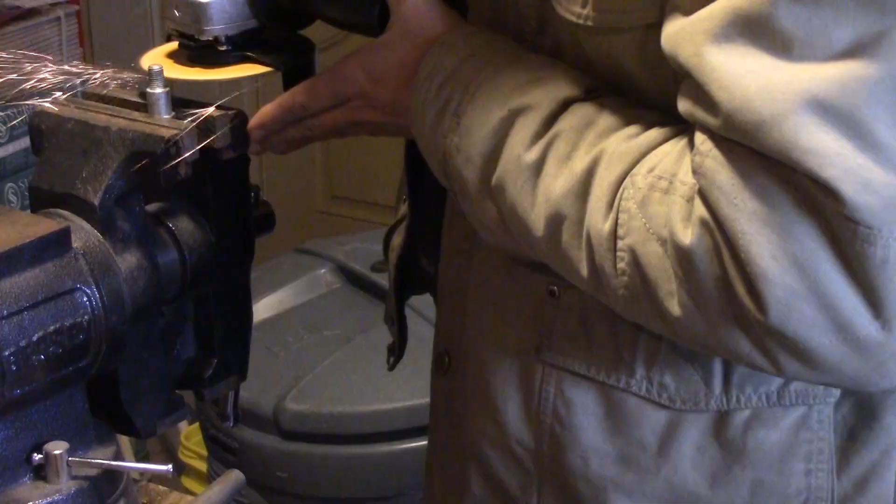It's pretty. If I'm not mistaken, these are from a Yamaha XS650, I think. Turned one into a cafe racer. I'm pretty sure these are from something on the back of it. This doesn't really have to be that exact. It's mostly just cosmetic. Now I'm going to blast these two little jobby doos onto their respective locations. Approximately. I'm not going to measure anything. I'm just going to blast them on there.

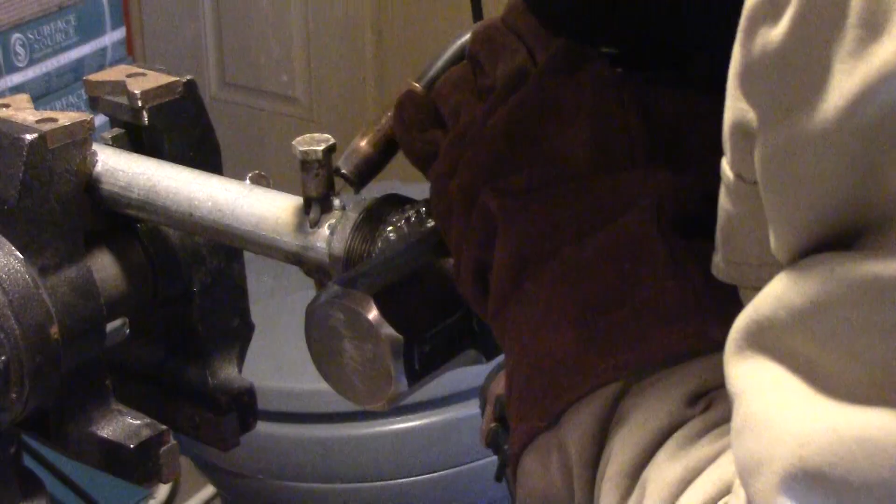Alright, I know somebody's going to say something because I'm welding on galvanized, but you've got to weld the crap out of a lot of galvanized to actually make you sick. So I don't really care. Who'd have thought installing support brackets on a rocket-powered sledgehammer, well, jet-powered sledgehammer, would be so much fun. Time to cut my extensions.

Now it comes down to it. It's time to put the plumbing on, and I'm going to cut a hole in the pipe here for the propane tube to come out and connect to all of it, and then I'll bind this together with a little piece of 3/8 inch copper.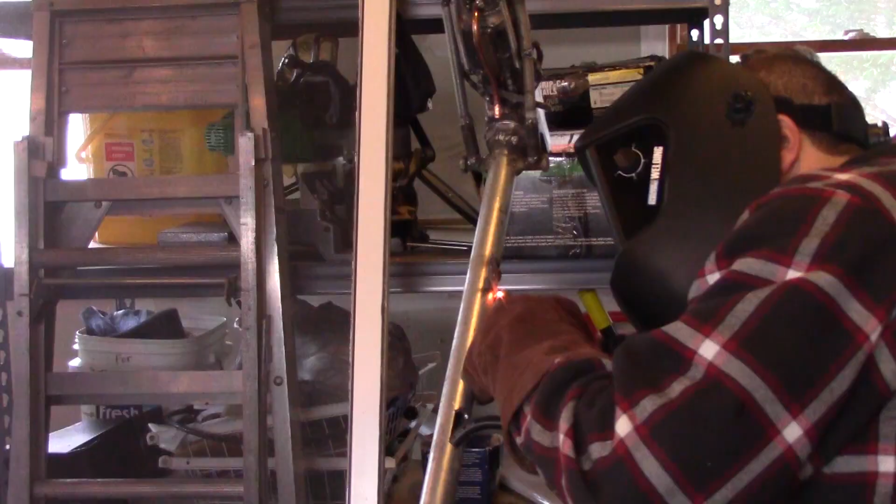Oh man. You've been recording for a really long time.

I very quickly put the electrical system together so I can test this thing. It's all relatively simple how all this goes together, considering I am terrible at electrical stuff, but this honestly wasn't too bad. The battery gets hooked up to this, you splice into it for this, and then yeah, it's pretty simple. One switch activates this little jobby here. You can hear it clicking, and the other one turns the fan on full throttle.

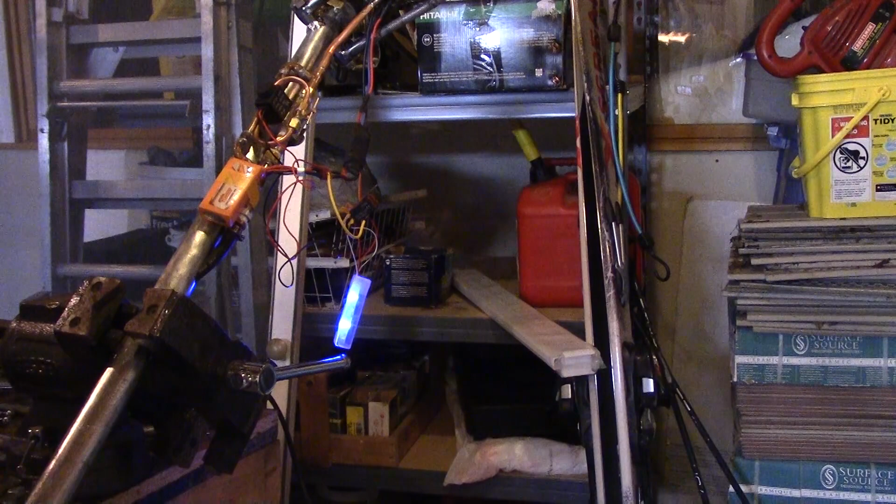And then I have two adjuster knobs here that adjust my idle and full throttle settings. And I'll make all this look pretty and mount it on there fully later, but I figured I'd just give this thing a little test right now. So let's fire it up. For first try, that ain't too bad.

So now I'm going to use silicone to help seal the minute leaks that I have in my fittings on this. And the reason that I'm not too worried about it, and I'm just going to use silicone to reduce the amount that comes out, is because the pressure that I'm running is not very high. And as an example, when there were leaks, I used a lighter and tried to light the leak on fire, and it would just puff a tiny flame and then it would go out.

Because as soon as you burned that dispersed propane, it wasn't leaking fast enough to maintain a flame. Now the reason I'm using silicone is because it's flexible. I'm gonna put this stuff on. It's just a small safety precaution. I'm not really too worried about blowing myself up or catching myself on fire, but you know, famous last words. If this stuff gets hit and moved around, it'll help to keep the propane in and keep the leaks to a minimum. It's just an extra safety precaution.

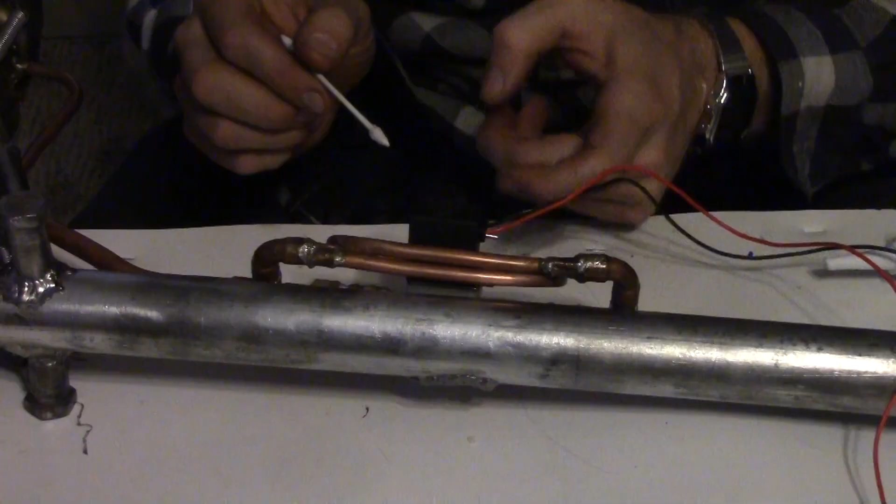Anyway, silicone. You might be thinking you shouldn't be touching all that silicone with your hands, but I'm not allergic to silicone or latex, ladies, or anything really for that matter. I got no allergies. So I'm not really worried about touching this stuff with my fingers.

I should also mention after that big long propane speech that that's why I think that I need more propane injected and not necessarily just a bigger flame holder, because if 10% is the upper limit for flammability of propane in the atmosphere, that means I need to put a huge amount of propane into this thing if I'm gonna run the fan that fast, because there has to be a stupid amount of fuel, because there's a huge amount of air traveling through this housing, because that fan puts out a massive amount of thrust.

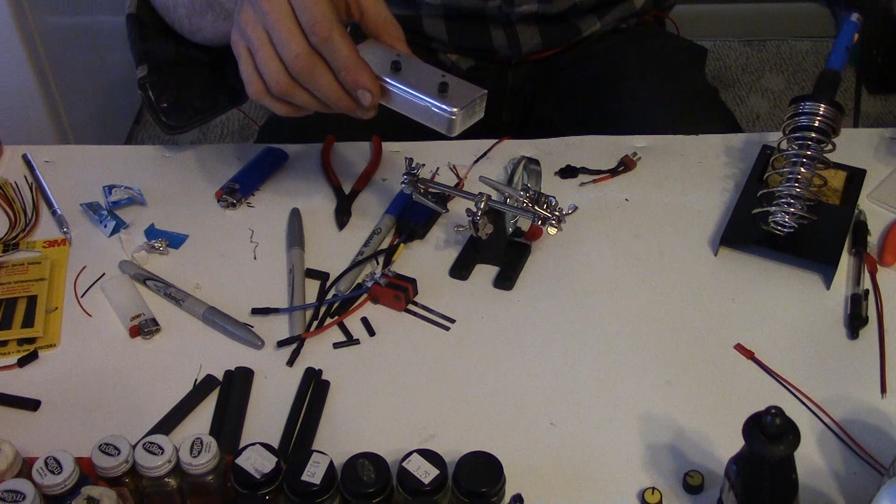Well, massive compared to like a house fan. I mean, this thing's an EDF fan, but still, it's enough thrust to make a little airplane fly. I think it's like a pound. Anyway. So now I just need to wire all the wires together, extend the wires for the battery, and put long wires on that go to the switch, and put everything on the sledgehammer, and then do some more testing. I also forgot to mention that on my servo controllers I just popped these little covers off, and the servo box that I used was a little 6-partition tackle box that you use for flies.

Alright, word to the wise. When you've got wires this small, just burn the insulation off. Don't try to actually strip them, because you're just going to end up breaking the strands of the wire inside, which I have done many times, and that's why they're so short coming out of this container now. Now it's just time to mount the wiring. Now that I have this clamped on, make sure it doesn't move, make sure I don't get any more leaks.

So I've got my speed controller right here. It's wired up to the engine right there, and then I have my wires for the servo stuff ran underneath this plate. And the signal wire right here is going to run down inside the handle to the switches. This box that I wrapped with the aluminum tape, I need to connect the power and ground to the power and ground that come out of the speed controller, and then the 2 signal wires for this to switch between the 2 servo controls will run down the handle also to the switch.

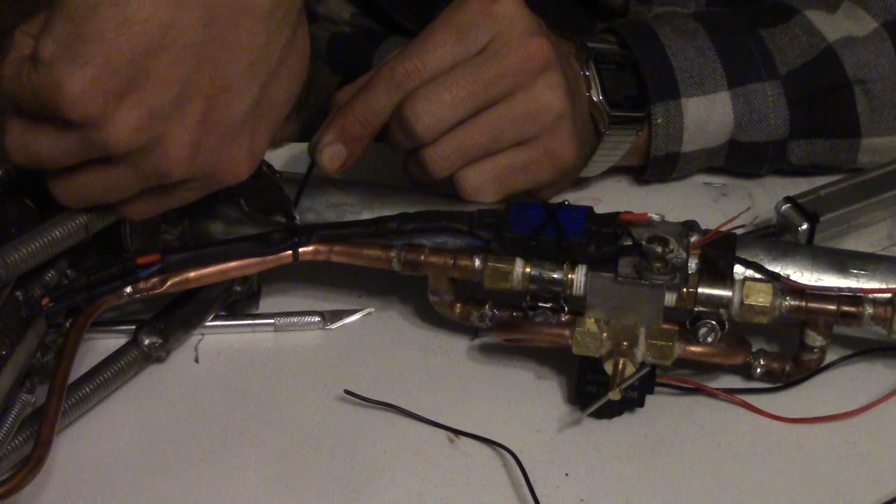And then I will run the wires from my solenoid down the handle to its switch respectively, and I'll be finished with the wiring. Well, and then I'll also have to run the wires out the end of the handle to run to the battery. Speed controller wires connected here, shrink wrapped speed controller. The positive wire from the solenoid right here comes into the positive wire that comes from the battery to the speed controller there. Both of those wires, positive and negative from the speed controller, are routed behind the hose clamp right here and run out back here and are collected with all the other wires.

The 2 signal wires are routed underneath. They bind up with the other wires right here. I started doing some of the marker work on there and painting the knobs. And then this is going to run through the handle with the tube down to the bottom. I need to cut a hole for the switch and wire everything at the bottom, and then stuff it all inside the handle. Like I said, when the wire's this small, don't try to strip the wire, just burn the insulation off, because the threads inside are so small, you'll just break it, like I did. Again, didn't learn from my mistake.

When I was a kid, I used to be notorious for twisting wires together. If I could teach myself anything when I was young, it would be that I should just take the time to solder stuff, because it's incredible what a difference it makes knowing that the wire's not going to come apart because you soldered it instead of just twisting the thing together. I spent so much time hoping and wondering if the problem with what I built was whether the wires had come apart because I twisted them together.

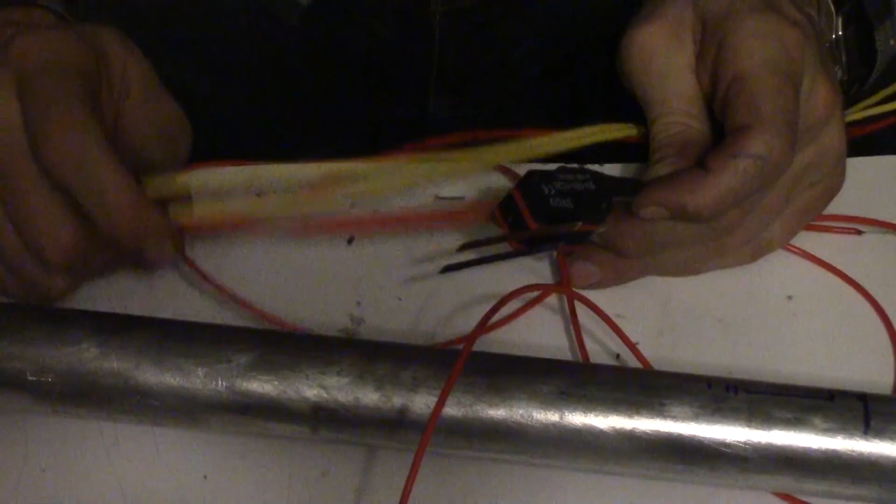How are you going to possibly know which goes to what? Well, that's where this comes into play. Just take a Sharpie, make some marks on the wires. It doesn't matter what it is. If they're the same color, just put some marks on it that you'll remember what it goes to, and when you stick it through, you'll know where to connect it. Easy as that. For instance, I have two yellow wires. One is positive, one's negative, so the positive one is striped with red Sharpie and the negative one is striped with blue.

I've ruined too many bits by getting them too hot in the steel and melting the epoxy that holds them to the shaft from these little Dremel bits. So I'm cooling this bit off with ice. I can't believe how much faster I cut through the steel with that being chilled with the ice cube. I think I got it. Yes!

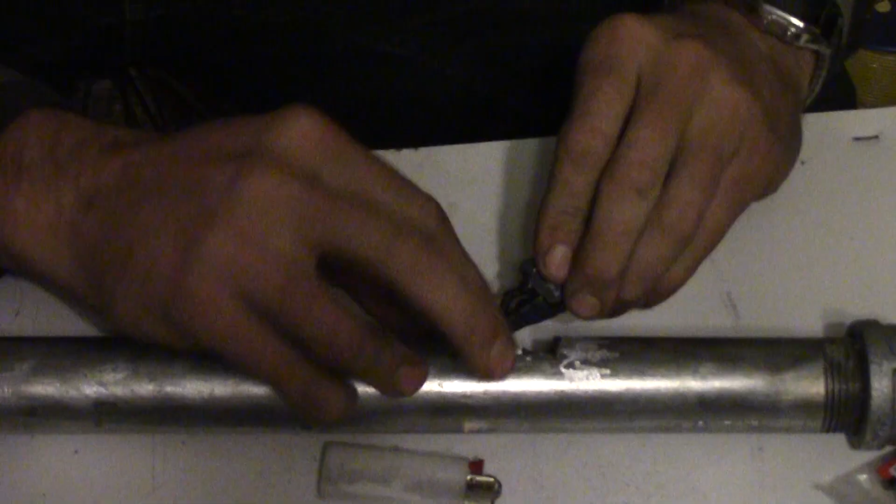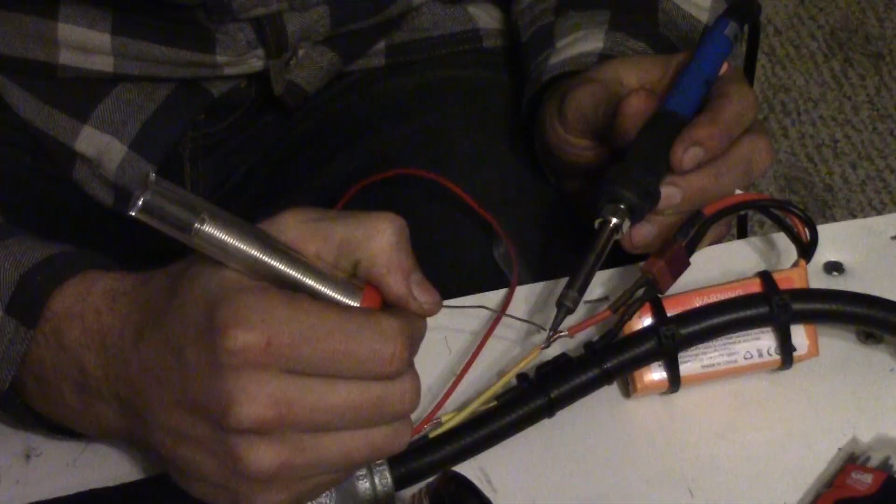Now I've got all my wiring routed through the handle. 3 signal wires get wired to the blue, which controls which servo controller is telling my speed controller how fast to make the fan, and then the red one is just simply ground disconnect for my electronic solenoid. It's done.

I knew after I finished this thing it was going to take some more refining and tuning, and I want to show you what I had to do to make this fully work. And honestly, this thing is stupid dangerous. The amount of heat that comes out is immense. You can very easily burn yourself. I don't want to be cliche, but do not build this yourself at home unless you are willing to risk getting severely burned or severely frozen by liquid propane in case you spring a leak somewhere. And I definitely didn't tell you to, and you can't sue me for it.

Anyway, this works really well, but you have to have a pretty substantial flow of propane. Now, the connection that I had on the end of my hose was way too small, and here you can see it. I had to drill that out and then knock a check valve out of the connection on the hose, which you're probably not even allowed to do. I don't really know. Anyway, once you get that out, it stops the restriction of flow from the propane and allows you to run this thing really fast with a huge flame coming out of it, which is awesome.

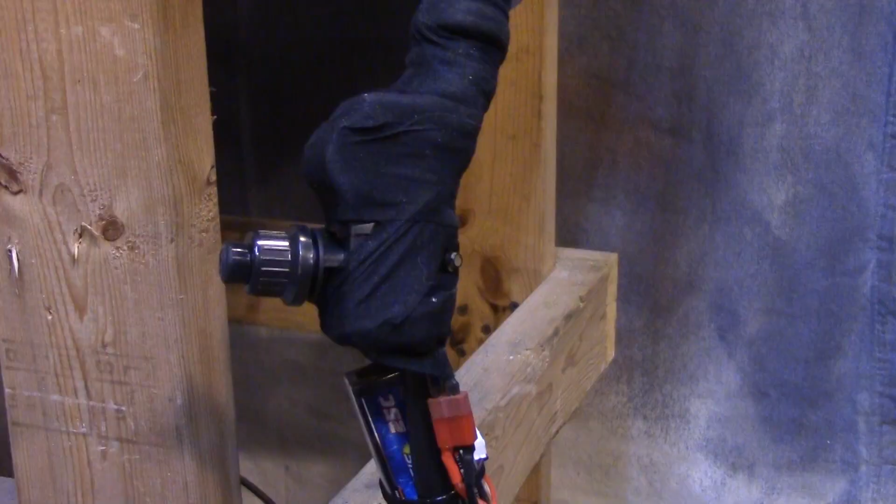Also, I added a grill igniter, you can see here, and now I'll just show you how to use it real quick. So you turn it on, you push the on button, the LED indicators from the servo controllers light up, that way you know you have power. Then you adjust it so that you have idle flow from the fan. Then you turn your propane on from the needle valve just a little bit, and you press the button on the grill igniter. That fires up your idle flame.

The most reliable way to make this run then is to turn the idle fuel flow up more and turn the idle fan speed up more. And the reason for that is because when you press the buttons to make this thing go to full throttle, the fan reacts extremely slow if it's running really slow. You turn the propane flow up and you turn the idle fan speed up. That way the fan reacts fast and the propane reacts really fast.

That way you can just push the button and it goes to full throttle, and you don't have to worry about like hitting one before the other or anything like that. And you can let off of them at basically the same time, and it usually still stays lit. If you want to make sure that it stays lit, you can just hold the fuel switch in for slightly longer than the fan switch. But nonetheless, it's intensely reliable.

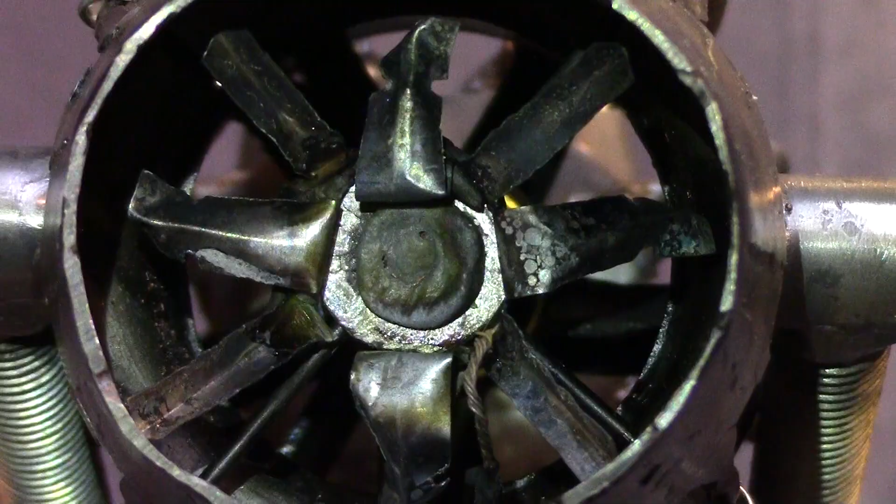And the only things that I changed really from when I built it were the grill igniter. I changed the valve that goes into the propane tank, and then here you can see my flame holder that I put inside, and I went through 3 or 4 different designs of this before I got one that actually works. And this thing looks crude, but it actually holds the flame extremely well, and it's a modified version of the last one that I tried. So this ended up working out pretty well.